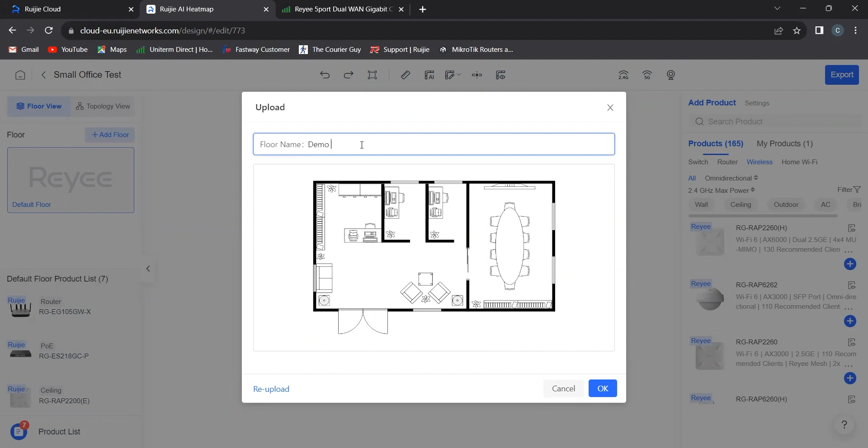Here we go, so a real basic small office. We'll call this office 'demo,' click OK, and there you go. So basically your small office plan that you've just downloaded.

Another cool feature, although it might not be exactly to spec, is that you can go on Paint or whatever and actually design a floor plan if you have the specific dimensions. Save it as a simple PNG or JPEG, and you can upload that. So you don't necessarily need a specific floor plan, you can design it yourself and add it.

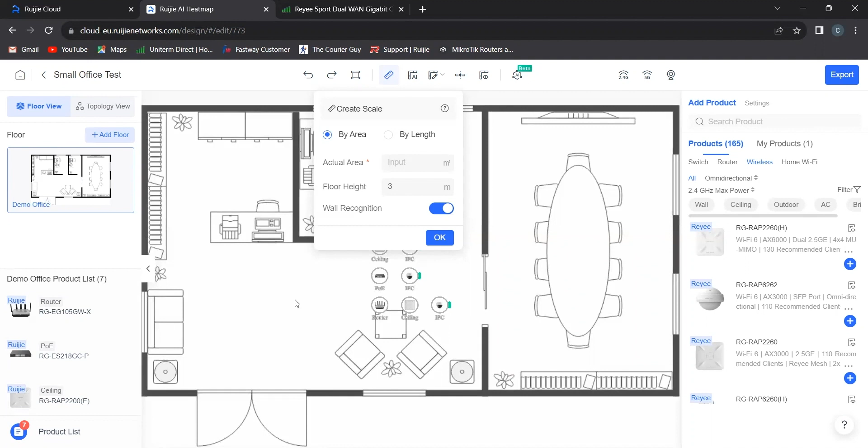In this case, I downloaded one from the net. So let's show what happens if we click by length. Click to draw a line segment, then enter its actual length.

This is where we're going to start identifying walls. I'll go from the top corner here, click, and take it down to about there. The actual length we'll input as 8 meters for argument's sake, and a floor height of about 3 meters is fine. Keep wall recognition on, since this will recognize and identify the walls in that specific floor plan. Click OK and watch as it generates.

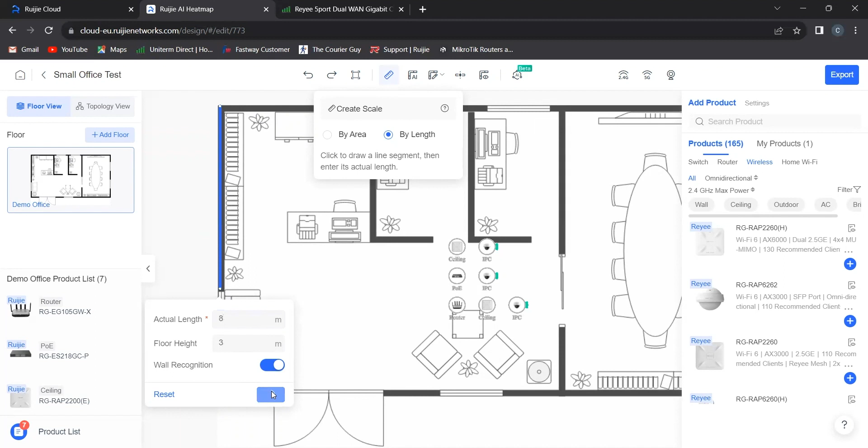There you go, so that's your demo floor plan available.

I'm going to start moving a few things around. As you can see, it's detected the wall. Now, with this access point in the center of the floor, since it's closest to the side of the room, you're not going to have any coverage here. The red being the poorest signal and green being the best, so we're going to start shifting things around.

From what I can see, this seems to be the small reception area. Let's place the Wi-Fi 6 router we mentioned, the all-in-one business router, there. And I think the PoE switch we can put there as well.

Now we're going to go through our access points. I think we've got a boardroom here, quite a decent sized boardroom. Let's add an AP on the ceiling of that boardroom.

So we've got exactly one access point left. For argument's sake, we'll put this one over here, and we can see this office over here has got pretty much no coverage at all. That's a cool design tool, where you can see exactly what you need to add or subtract.

So in this case, we'll go back to our list on the right hand side and choose a cost-effective gigabit AP, the 2200E. We chose 2 initially, so we'll add a third. There we go, let's zoom in and add this one inside here.

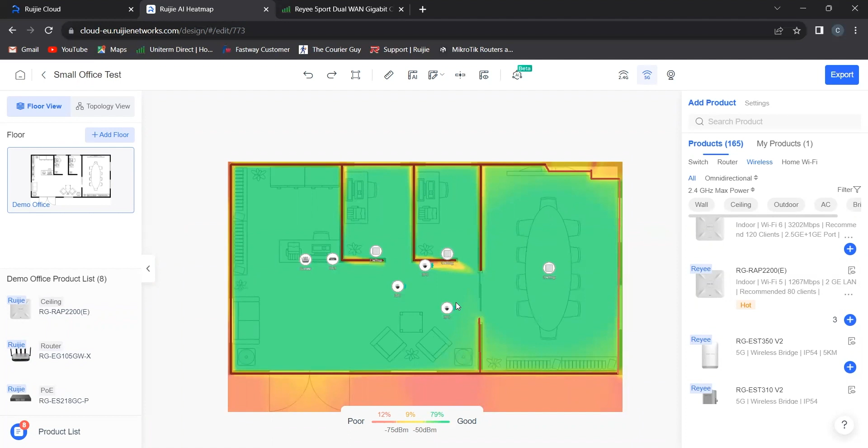So coverage-wise, pretty decent there with that basic setup. These are the cameras that I spoke to you about as well.

Let's go ahead and place the cameras. This seems to be the doorway over here, so let's place a camera in the corner over here, grab our second camera and place it in that corner over there, and the third camera we'll place in the boardroom in the corner right there.

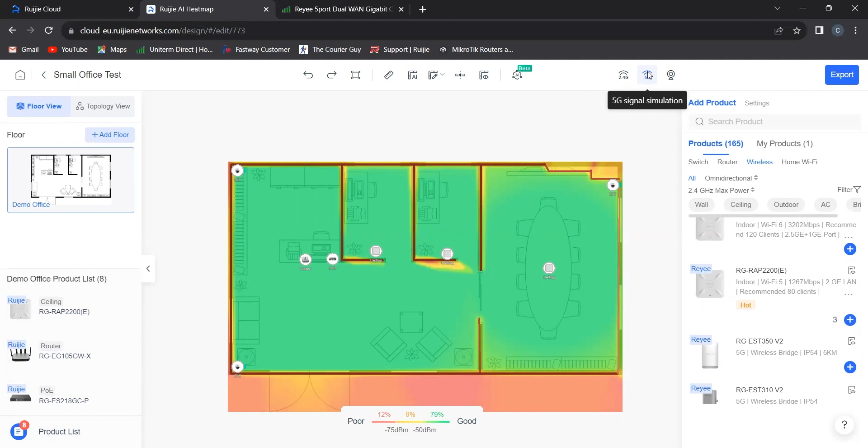This is a really cool feature. So you can see what kind of coverage you're looking at by going to the top right hand section. You've got your 2.4 gigahertz signal simulation as well as your 5 gigahertz. The 5 gigahertz is stronger in terms of speed, so the throughput is a bit better, while the 2.4 gigahertz band has a slightly stronger signal.

If you click camera simulation, I'll show you exactly what this does. Now you have the cameras that you'd set, and this is obviously your beam width, which you can change by angling it. Just on that simple green line, you can go and adjust it.

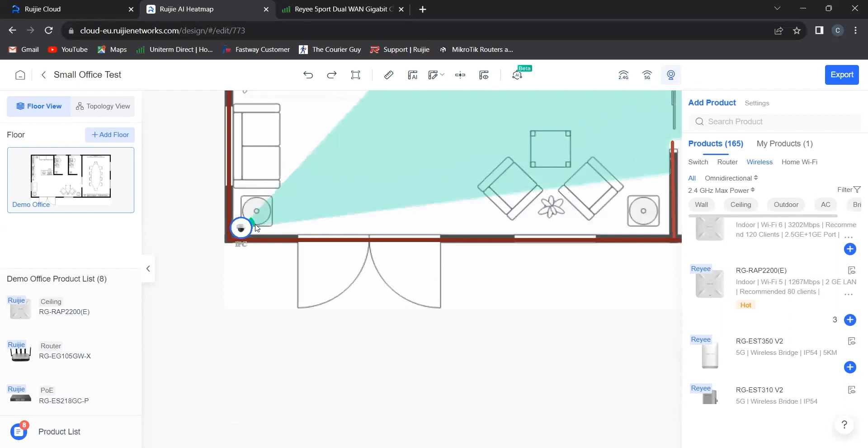Let's keep it towards the center of the office. Let's change from the boardroom, and we'll change this one around as well, getting that towards the door. We'll change our third one as well towards the door.

There you go, so that's basically your camera coverage as well. A pretty well lit up coverage, you've got basically the entire reception area in view, so more than sufficient for security purposes.

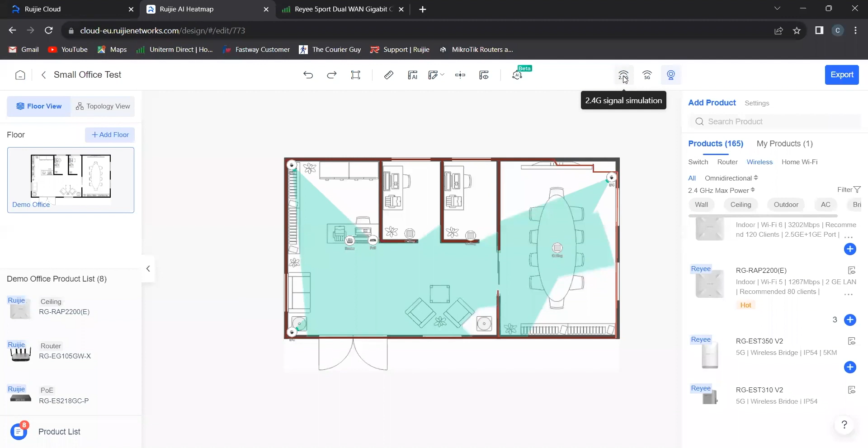And like I mentioned, if you want to go back and see the 2.4 gigahertz coverage, you can click on here, and the 5 gigahertz simulation as well, you simply click on there. So there's your options that you have.

Then if we were to choose topology view, this is just basically the items that you've chosen in your virtual topology. Obviously it does the sequence as well, so it goes from your router through to your switch, and then through to your end products being the access points and the cameras.

I actually had a pretty decent question asked some time back as well, like what happens if you've got this exact situation for this install and you've got say a second floor that you'd need as well, would you be able to add a second floor? You most definitely can, in which case you just click add floor and you can upload the second floor plan as well. So in the case where, for example, you've got your first floor much like this, and you've got a second floor upstairs that you just want to go and add. Let's say it was a small warehouse upstairs or storage room upstairs, whatever the case is.

You obviously can't see based on the first floor what the coverage will be upstairs. That's where you'd need to, by trial and error, just have a look and see what kind of coverage you get from installing on the first floor if you do get anything upstairs. If not, just upload that second floor plan and then add accordingly if you do need further access points or routers or extenders and so on and so forth.

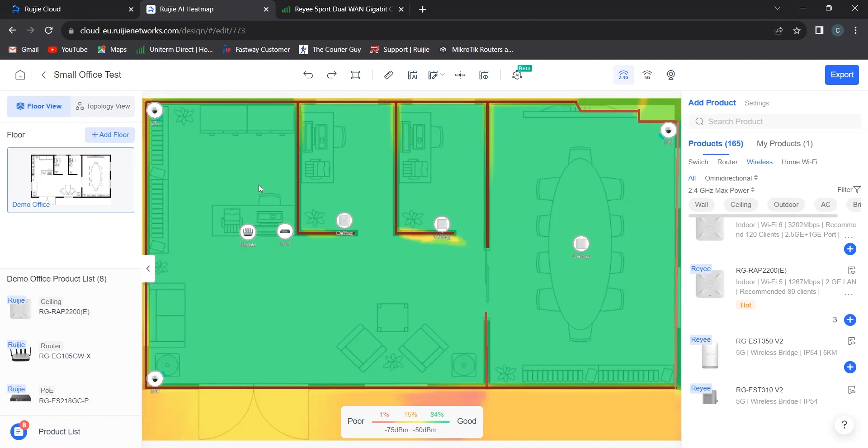So a very cool feature there as well. Now let's say, like I mentioned, as an installer, you want to go and promote this specific install to a customer where they've come to you and asked, listen, I need you to design a floor plan. Can you perhaps support this by showing that these items are going to work for my install?

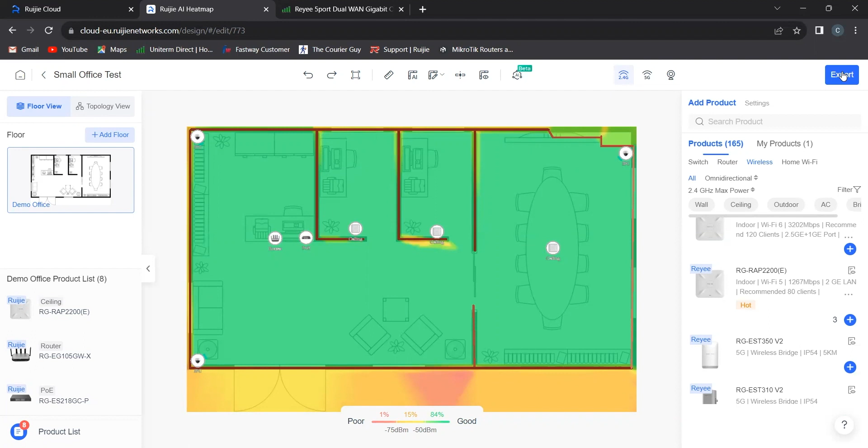So a really cool function here now is in the very top right hand corner, you've got export. So let's go ahead and click export, we'll just wait for that to load. All right, here we are.

So basically as an export view, these are all the checkboxes that you've got. This is what's going to be present in your final saved draft, in which case you can choose between Excel, PDF or Word formats. I'll show you that a little bit later as well.

Then we'll have a look a little bit lower over here. This is your view by device. So for example, if you have all these devices listed, you don't want to show by floor, it's just all the items that you included for the demo, it's going to pick up here by the view by device. Or you can just choose view by floor, in which case I've only got the single floor available, but if you had two floors, it'll just show you which floor is which. In which case our floor, which was listed as demo office, you'd just say listed as floor 1 and floor 2, and all the items will pick up per floor.

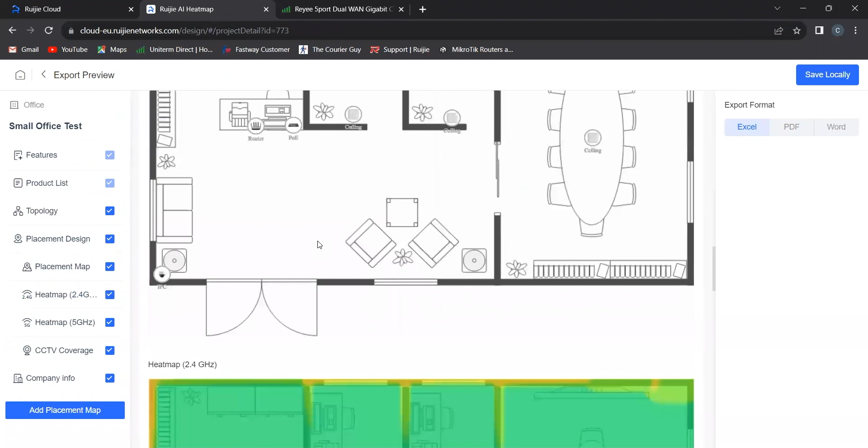So let's go back to view by device. Fully customizable, as I mentioned, so you can take out certain things if you need, like company info included. So let's go ahead and scroll down to the topology and your placement design for the demo office.

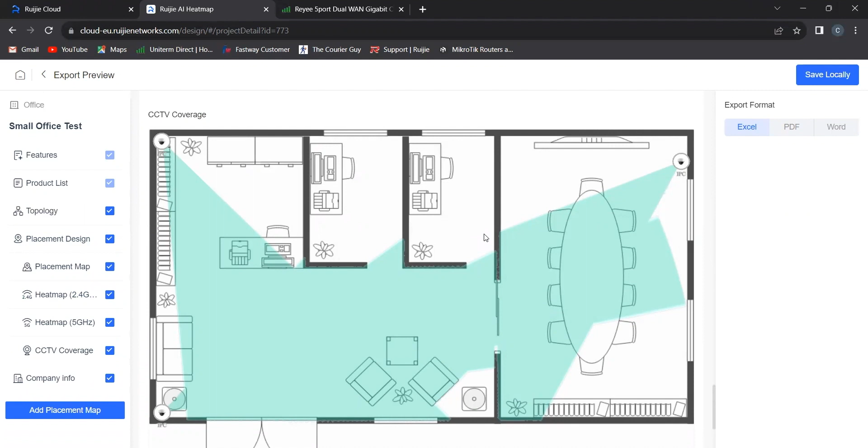Okay, this was the heat map, so it basically shows you what you achieved with the specific install. So there's your access points and routers, and we'll go to the 5 gigahertz one as well, that's your coverage expected on the 5 gigahertz band. And then there's your CCTV coverage, so you can see it's all split quite nicely for you to present to your customer to show them this is your estimated coverage and throughput based on the items that you've chosen.

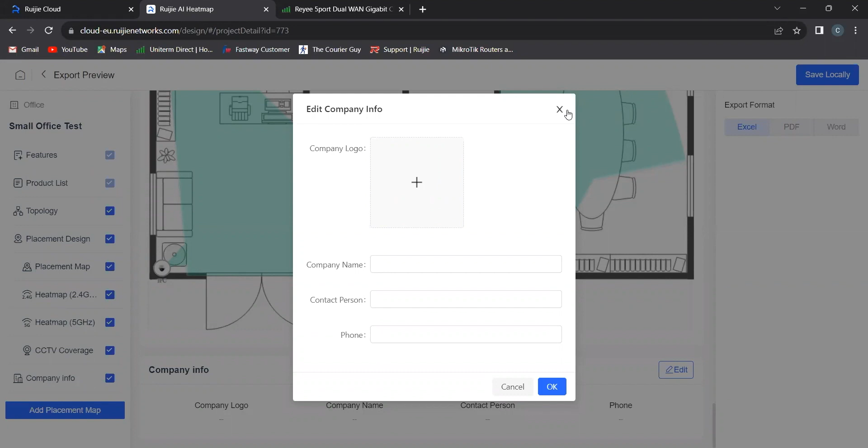It will go a little bit further down. We'll go through to company info, so it's another cool feature there too. If you were to click edit, you can now go and put in your company name, contact person, contact details, as well as a company logo. So you can go and add that in as well if need be.

And then once you've chosen everything that you would like to present on that final format, you go and click here. So Excel, PDF, or Word. Let's choose PDF in this format, and we'll select that.

Before we click save locally, this was the costing part of things I mentioned a little earlier in the video. By exporting the included cost value, if I click that, for example here, let me scroll across so I can show you.

Remember earlier there was that field where you could go and change specific pricing. This is where that will show up. If you'd like it included for quoting purposes, you can add that in. I don't have any quotes needed now, so there's no pricing included on this, so I'll just tick that off. Another cool feature - you can add the pricing if you want, present it to your customer, and then pricing is all included.

So let's go ahead and just save locally and show you what happens from there. Okay, it's loaded - the BOM small office test - in which case we'll click to open that as a PDF. There you go. So that's your full demo done via the AI heat map on the Reyee website.

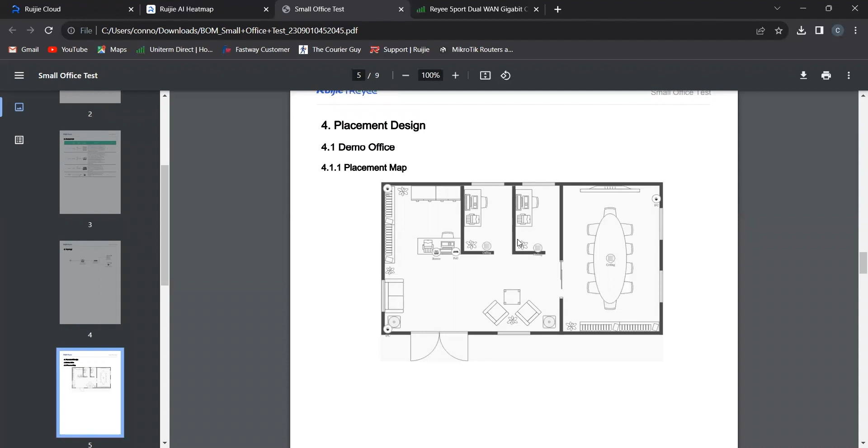Scrolling a little lower, here we've got the placement design of the demo office and placement map. This is basically your install design, without any coverage as yet - just to show you what you've listed as the floor plan.

If we scroll a little lower, once the items are installed, this should be your theoretical Wi-Fi speed and coverage in that specific area. Once again, it's split on 2.4 gigahertz and 5 gigahertz, both viewable - a really cool feature.

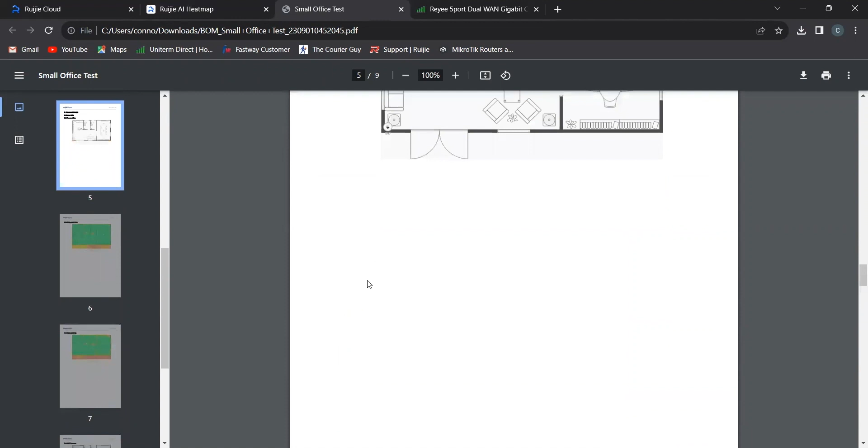You'll see the CCTV coverage, and scrolling a little lower, there's your small office test with your company name, contact person, and phone details. So there you go - just something small I thought I'd show the viewers out there.

A really cool feature, in my opinion, is that you can offer something like this to the public. It just makes life a little easier for installers, and helps promote your install a bit better too. From an end user's point of view, it's difficult choosing specific products on the market - there's so many to choose from, and what do you choose?

So if you're interested, I recommend going through Reyee's entire catalog. If you're going to go through with it, hop on that AI heat map and check what products of choice could work for your install. It'll show you what you're looking at in terms of coverage - go ahead, design it, and check what you're looking at.